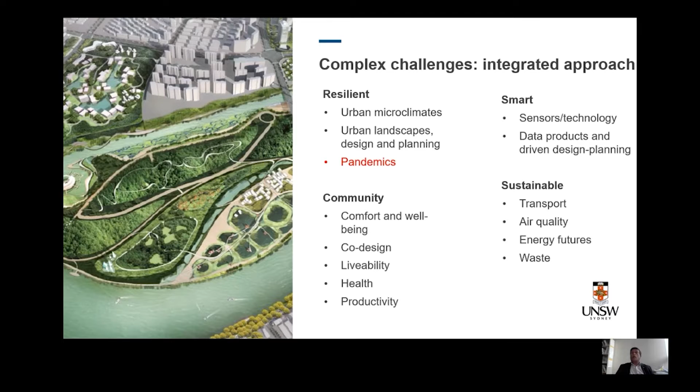So pandemics have caused a conflict with transport provision, because pandemics suggest that you don't hang around together much, and public transport works on the premise that you have a full bus or train. So there are some conflicts beginning to emerge which previously were not as much thought about. But within that, we are beginning to think about smart cities, sensor technology, data products, data-driven design, and so forth. So the whole idea of creating better cities, low-carbon cities, is quite complex and increasing in complexity.

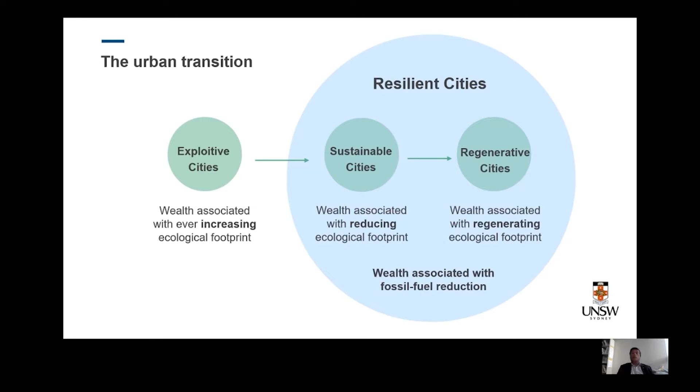We know we have moved from the old world of exploitive cities, where wealth was traditionally associated with increasing ecological footprint. And now, as we move towards resilience and more sustainable cities, regenerative cities, we are beginning to see a strong case being made that it can be done with the right knowledge, but also, from an economical point of view, it can be done without that much cost.

The United Nations had looked at sustainable development goals some time ago. A lot of those are good foundations for good design and planning, and looking at cities in particular. Much of the world population lives in cities, most of the consumption lies in cities in most countries, and a large part of the emissions come from around cities. It's not the case for all countries, but where I come from in Australia, it is the case. So trying to deliver on resilience and sustainability, a smart future city and the sustainable development goals brings a lot of knowledge needs for the architect, the planner, designer, and landscape architect.

Other complexities are mega trends of globalization and urbanization, demographic changes where people are getting older and how you deal with those issues, climate change. A city needs to be competitive, economically competitive, so that it attracts people, talent, and business. But at the same time, you need to be mindful about the environment, so that if the environment goes down, your competitiveness goes down. If the environment goes down, your quality of life goes down, and your competitiveness goes down. So they are pretty much interconnected, but you need to balance between these in terms of urban planning. And good governance, obviously, is a key part of that. So there is an immense challenge in delivering that.

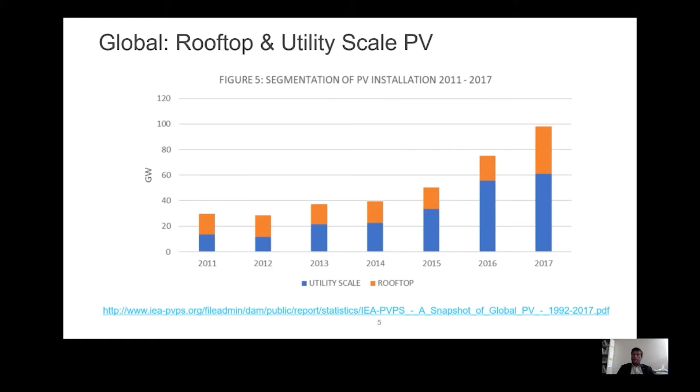When you look at, say, within the city, the issue of energy, which is much closer to where my interests lie: photovoltaics, solar energy, for example, is going through an exponential increase in use, and of course, being greener energy, it is clearly a good idea. In many places, my own university here, UNSW, is now, from an energy point of view, neutral in terms of what we use and what we generate.

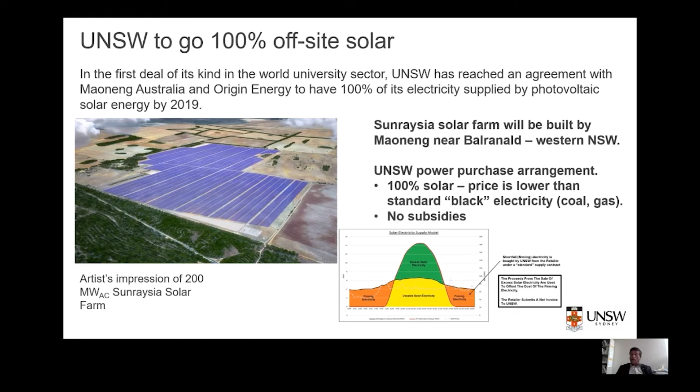So we have a huge solar farm about 1,000 kilometers away from where we outsource our differential need for electricity. So over the daytime, we generate so much more than we need, which pays the debt for the nighttime use, which is still quite significant base load. So we are doing it this way, and it is being done economically on a 15-year power purchase agreement. So it can be done cost effectively and economically as well.

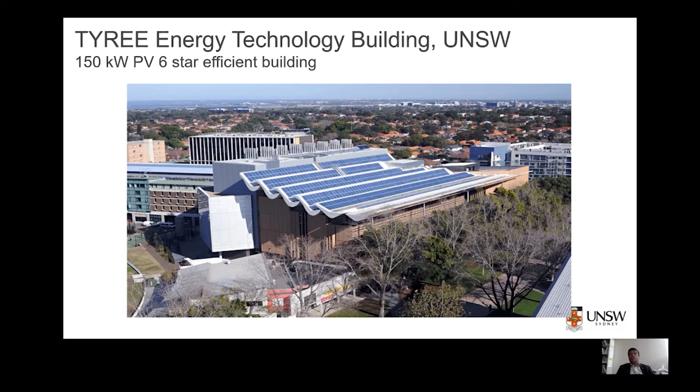And even our own building, this is the building I work in, and it is largely green. It's a 6-star building with a lot of photovoltaic energy, and the technology was actually invented in this building. We have one of the world's largest photovoltaic research groups working in this building. So it's good to see a showcase building which shows students at a university not only what we do in research, but how we teach people.

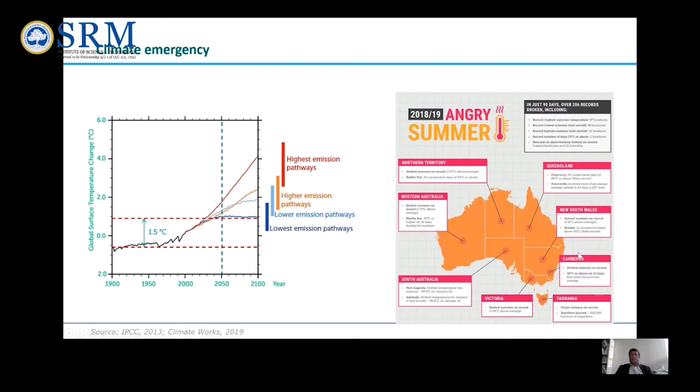But in more recent time, what has come to light is the emergency nature, climate emergency. Architects, engineers, landscape architects, all are joining the Architects Declare movement, which is trying to do things much sooner and much quicker. Australia faces serious urban microclimate problems where massive heating, above 40-degree days, the number of days we are getting over the year has increased in the last 10 years immensely. And we're getting 8-10 days of 44, 45 degrees in some of the towns like Adelaide, for example.

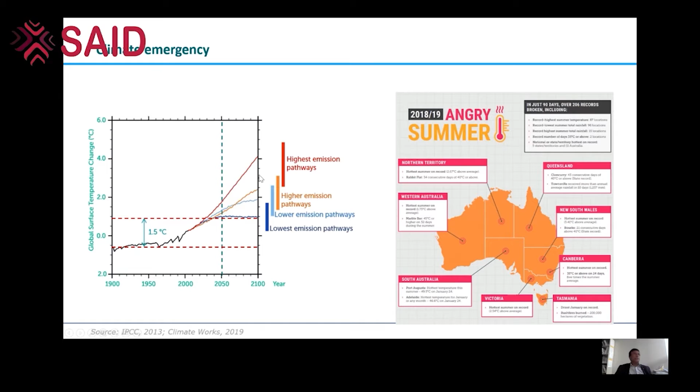So when we look at the temperatures going up, what we need to do is somehow quickly turn it around. And that's a challenge for urban designers, architects, and city planners. What is being done is a lot globally towards net zero carbon built environment. This is the big movement, and we find that within Australia a lot can be done, same as all other countries, I guess.

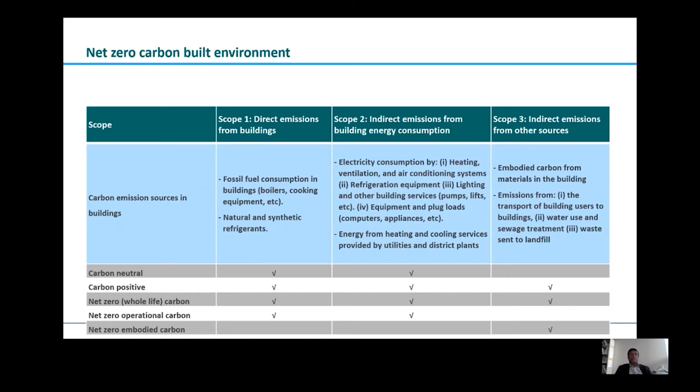We look at not only the operational energy of the building these days, but we go way beyond that into what they call scope 1, which is direct emissions from buildings, scope 2, indirect emissions from building energy consumption, and scope 3, indirect emissions from other sources, all combined, so that we are taking a good account of what we emit in terms of carbon from cities, and particularly buildings.

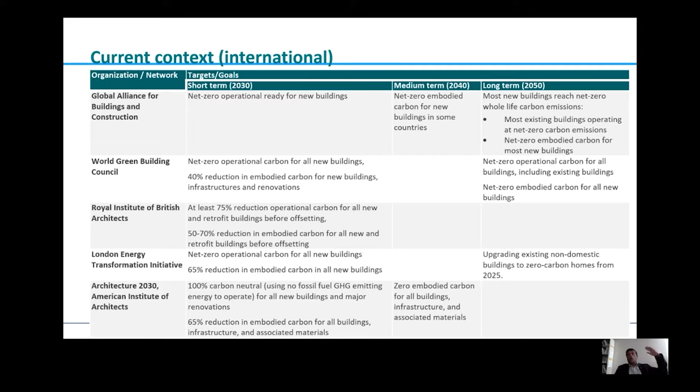Groups like the Global Alliance for Buildings and Construction, the World Green Building Council, the Royal Institute of British Architects, and so forth, are all beginning to prepare their short-term, medium-term, and long-term goals. And they're beginning to look at not only operational energy, but embedded energy, and trying to develop guidelines in terms of how we can guide our professionals to design better in terms of not only the long term, but short term: how quickly can we turn them around towards low carbon and zero carbon buildings?

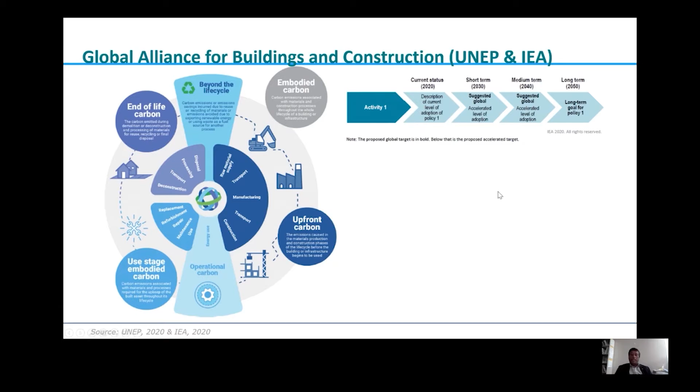The Global Alliance for Buildings and Construction and IEA are beginning to look at now the entire life cycle, from embedded carbon, upfront carbon, operational carbon, and end of life carbon. What can be done in each of the stages, and not only in the short term, but in medium term, what would be strategies to actually bring it down, because it's so urgent now. We need to be much more defined, much more able to think through what an architect can do in terms of meeting these sorts of requirements.

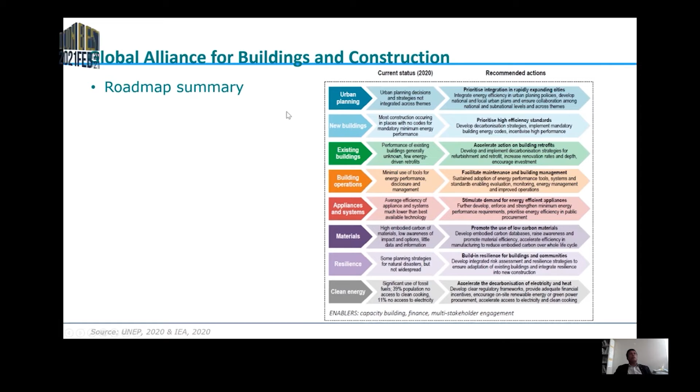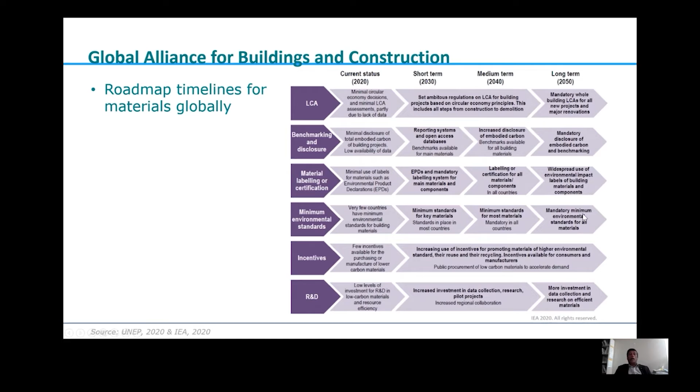There are roadmaps. The Global Alliance, and you can check their website out, has a whole range of initiatives from urban planning, new buildings, existing buildings, and so forth, in terms of recommended actions more broadly. But each of the countries are beginning to do this more specifically for their different climates, different building types within their country, and I'll talk about mine shortly. But these are all practical and doable, so we can reduce carbon rapidly in our built environment sector.

What we're doing in Australia, and I'm in the process of writing a book for Palgrave Macmillan, where we have a two-part publication coming out very soon. One is the book itself, which is on climate emergency, pathways to zero carbon, and a guide.

So the guide is just a 20-page illustrated document for architects who don't want to read a lot, quite rightly. And the book is for those who want to read deeper and look at examples around the world of what has been achieved measurably. The difference in this book is it's science-based targets, science-based goals, and what can be achieved in a more practical sense. In other words, we measure post-occupancy performance and not just look at what you call aspirational numbers.

It goes beyond that. We are also looking beyond zero carbon energy forecasts towards other work that my center is beginning to get very seriously into, which is looking at urban microclimates, and to what extent these will change temperature profiles. In Sydney, one end of Sydney can be 10 or 15 degrees higher in temperature than the other end. So Western Sydney, in Penrith, can be about 40 degrees when it's less than 30 degrees in the eastern suburbs of the city. So these are important issues. They have a significant impact in the future on energy consumption when the temperature differential gets even higher.

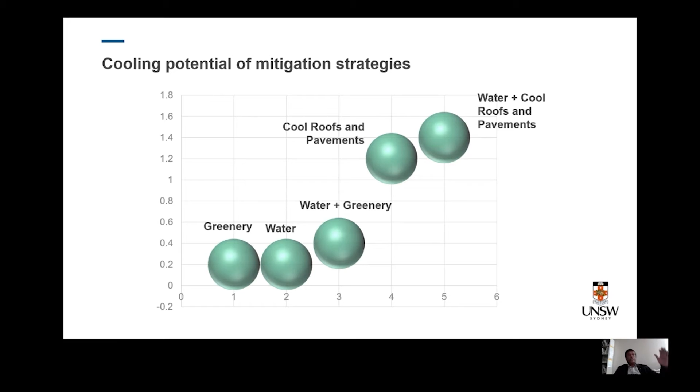Collectively, what can be done is that we can have about a 2 degree or so reduction in terms of the peak temperatures. So that's significant because it can make the difference between what could be a really uncomfortable temperature and something that is more bearable. So good design and planning can have that order of difference. Especially vegetation and greenery has a significant potential, as we all know, but we are doing deep work to quantify a lot of that.

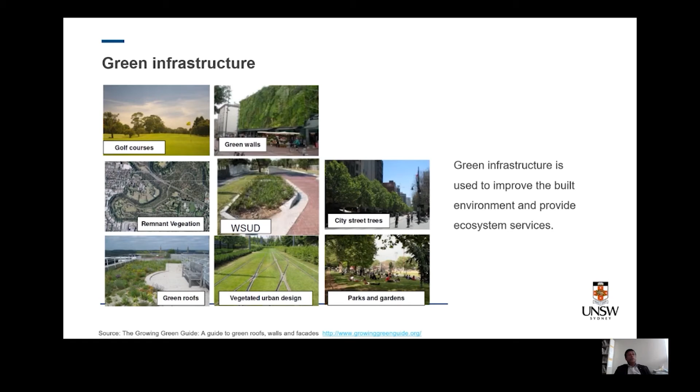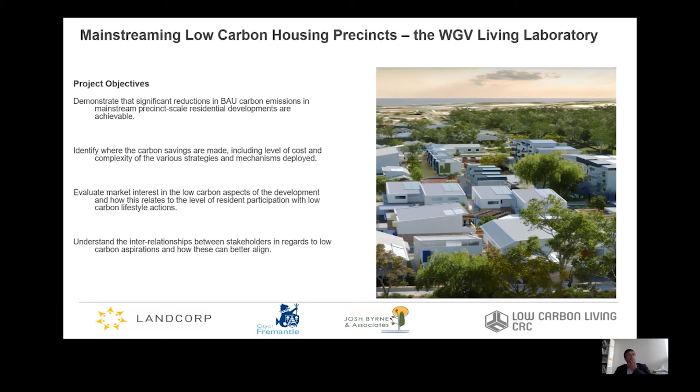We have also been doing a lot of work looking at zero carbon settlements, many houses at a time, where they have not only community renewables, community storage, but also peer-to-peer trading. I'll come to that in a minute. But we have developed platforms that allow for trading electricity between one house and the other before you buy from the grid. So those technologies are very much coming around these days.

We have produced tools, the integrated carbon metrics tool. You can Google this and download a copy of it, and this looks at a whole urban area at a time, and you can look at the operational carbon, the embodied carbon, services, all the scope 1, 2, and 3 carbon around the cities, and then start implementing measures and policies to lower the carbon over time, and also use the tool to monitor that. So it's a very reliable science-based tool.

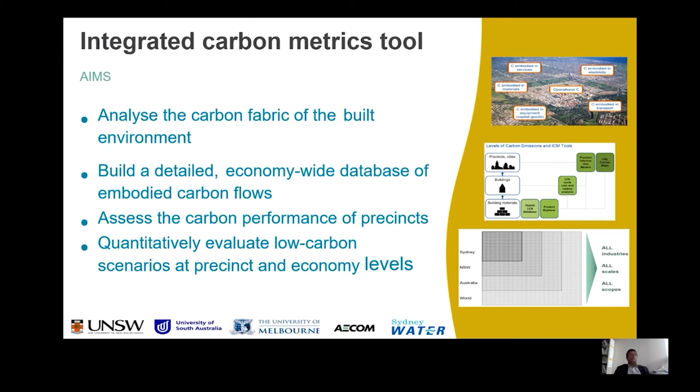We're also looking at low carbon materials, geopolymer based materials that we are developing. We're testing them in high degradation environments like oceanfront, and then we'll be using them much more widely as part of standards and codes on buildings and so forth.

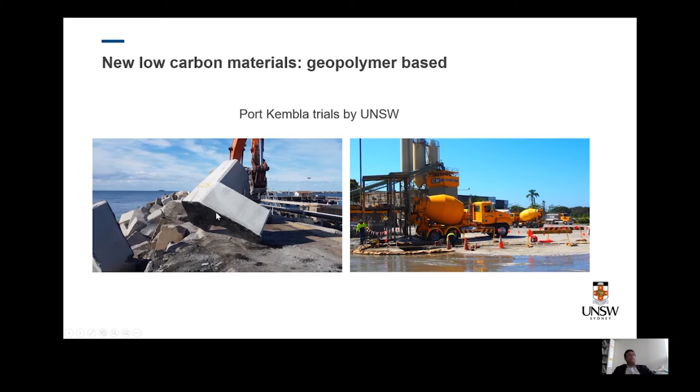I mentioned the peer-to-peer trading platform. This won us a Global Disruptor Award at Davos, the World Economic Forum. And the award was given by Richard Branson, and the author of that technology is Dr. Gemma Green here. And it simply allows you to trade energy between houses. One house can talk to the battery of the other house and, if they are not home, use energy from there.

And that accounts for using blockchain in terms of then keeping track of who uses how much from others, and there's a bill at the end of the day for green electrons transferring between houses or groups of houses, and the last option always being that you can go to a grid instead of have a blackout. So those technologies are now coming up.

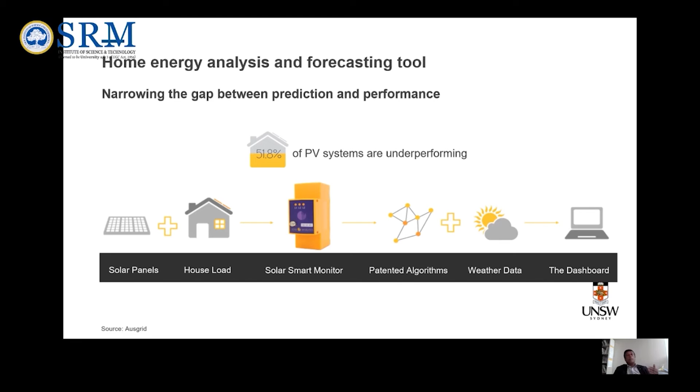When people talk about photovoltaics, in Sydney, we found that nearly 52% of PV systems are underperforming. People put PV on roofs, but they don't track it. They don't have monitoring at a household level. So what we have done is a precinct-wide tracking tool, which a company now runs, and they let the owners know if their system fails. And they can conduct maintenance to make sure it works. So in this case, a PV system which is supposed to generate so many electrons a day, you can be sure that it's doing that. Otherwise, you can detect the faults.

We are also doing a lot of work in building code to drive high performance at the best performance level. We needed a building code which is mandatory. So we did reports from our center to the government and developed trajectory for low carbon buildings 10 years ahead at a time, and what building code changes might occur. And as a result of that, you can drive the building stock that is coming up towards zero carbon. So these do allow you to use government instruments, providing the right evidence for policy to move governments towards a higher performance outcome. And at the same time, we do a lot of work for government in general.